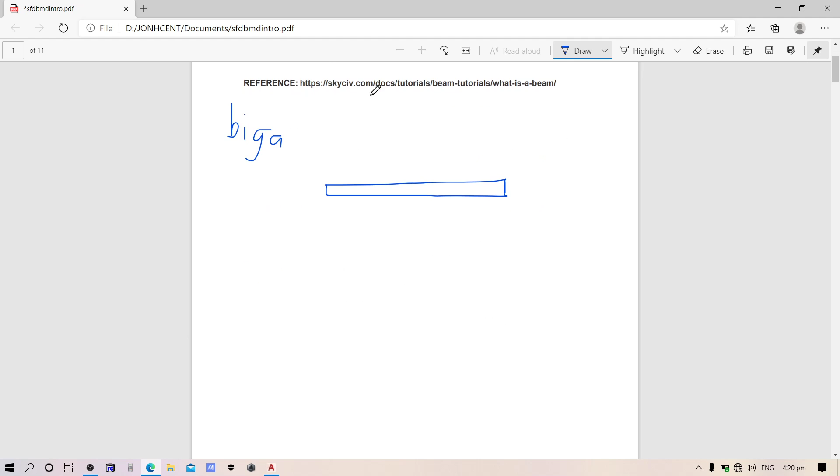Depende sa design. So, we have the T-shape. That's the T-shape beam.

We also have the channel. This will look like that.

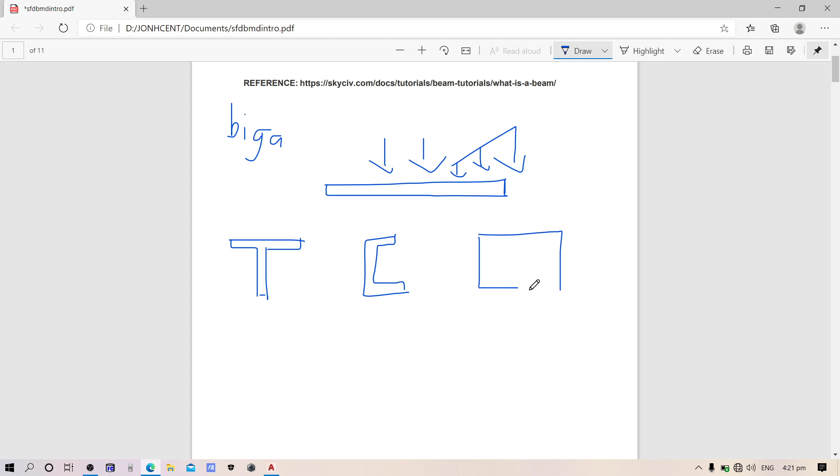Then we also have the rectangular hollow. This is typically the reinforced concrete. So, those are some of the types of beams.

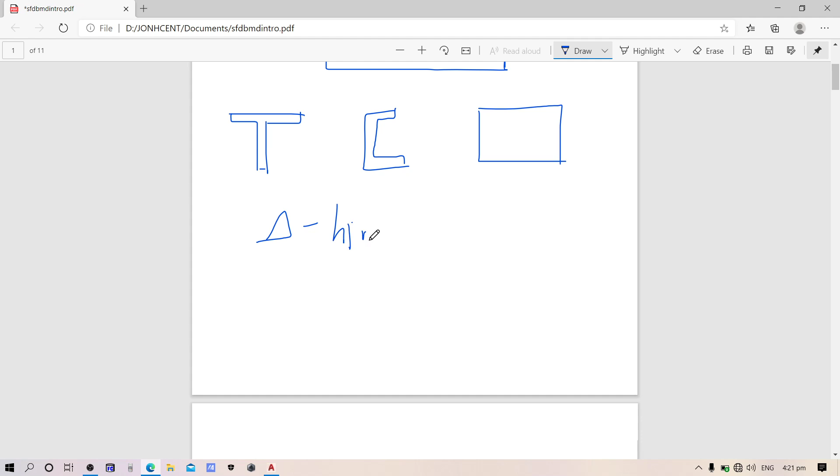So, we have types of beams. We have the simply supported beam. This member, if you recall from statics, this is a hinge, and this is a roller. So, this is its reaction.

As we remember from structural theory, we have a simply supported beam where both ends have supports. For the overhang beam, one end has a support while the other end is hanging, hence the name overhang beam.

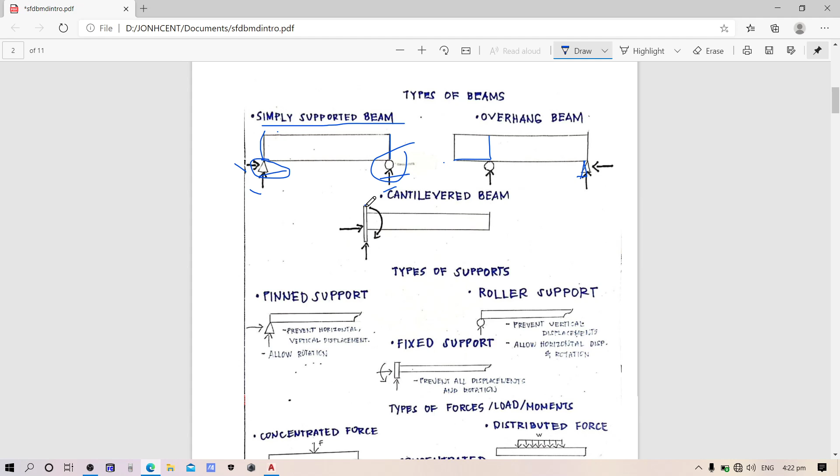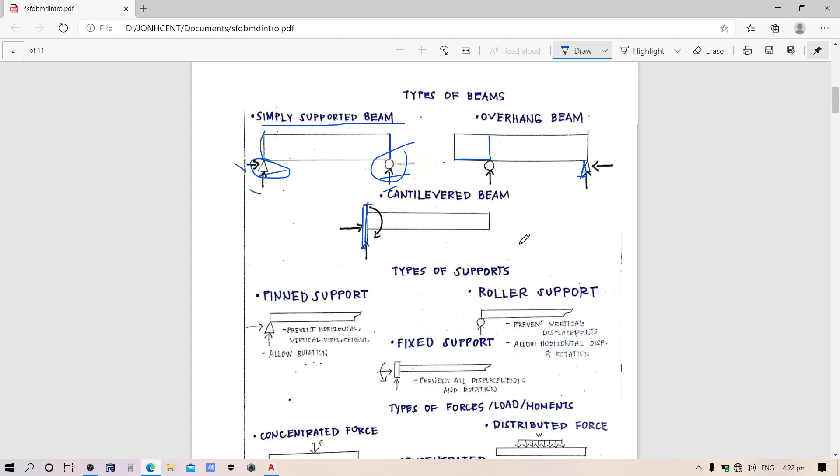So, the types of supports we have, based on these three: we have a pin, which prevents horizontal and vertical displacement, but it allows rotation.

Then the roller support prevents vertical displacement. So they're different. They're the same in that both prevent vertical displacement, but the difference with the roller is that it allows horizontal displacement and rotation. So they're only the same in vertical displacement, not in rotation.

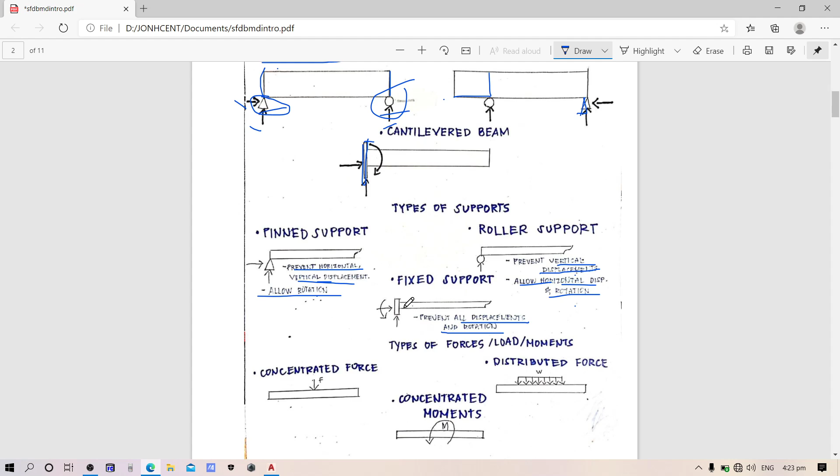So for the fixed support, it prevents all displacements and rotations. That's the one in the cantilever. Fixed support is what we call this part. Let's make it red. This is called a fixed support.

So we have types of forces. Commonly, we have a concentrated force and a distributed force. Then we have concentrated moments, which we may encounter in previous problems, so I'll show how to treat them.

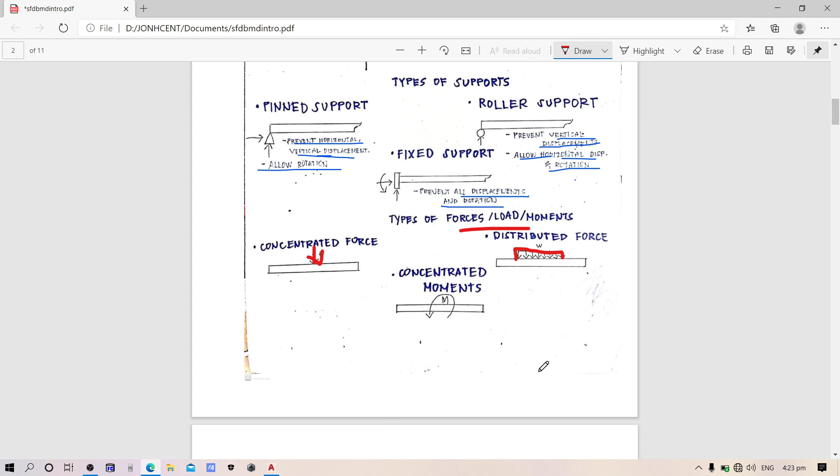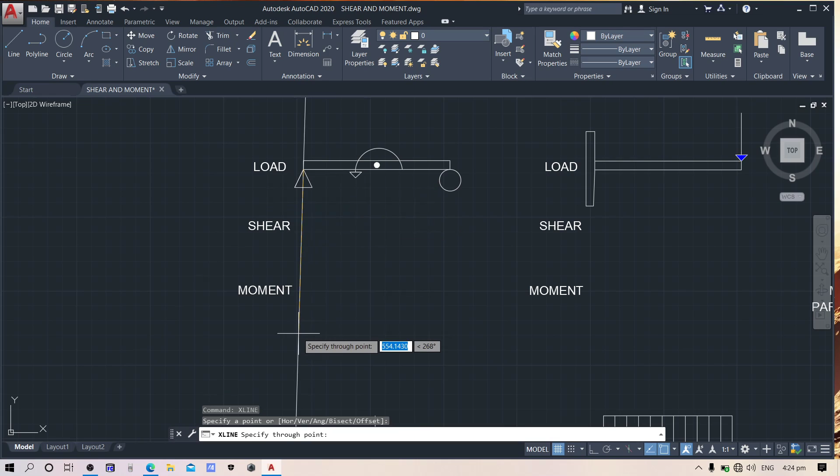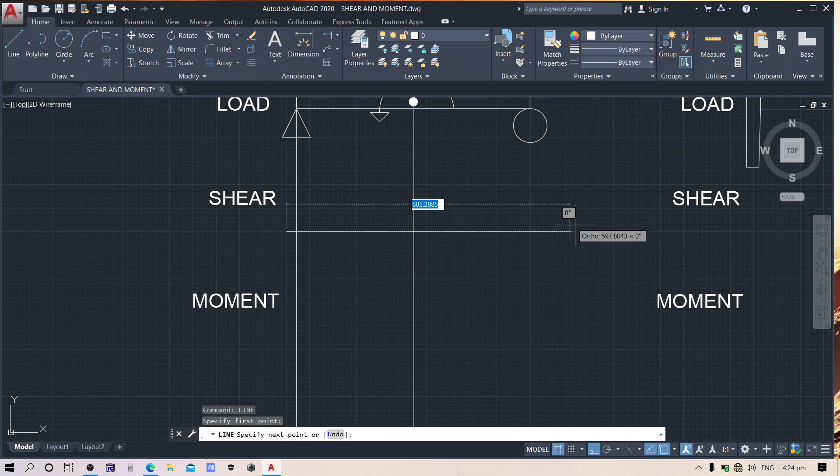Okay, so that our drawing is even. So here, the shear diagram of a simply supported beam, as you remember, this is a simply supported beam loaded with a concentrated moment.

If we go back to the PowerPoint, we have a concentrated moment. So here, the shear diagram will look like this.

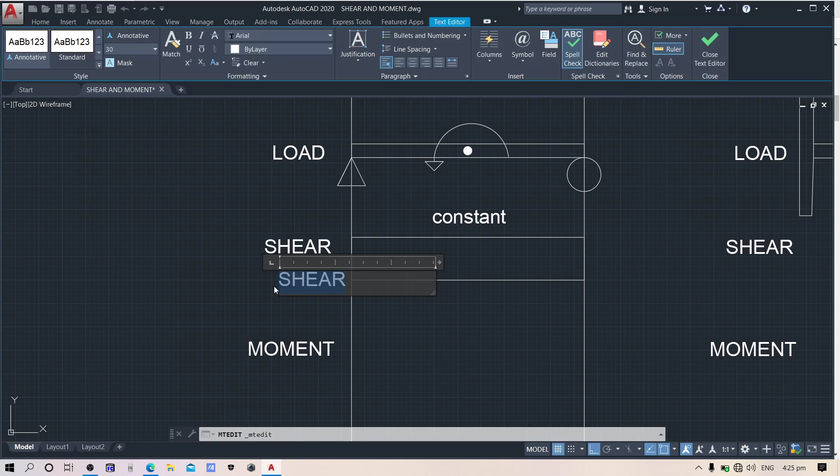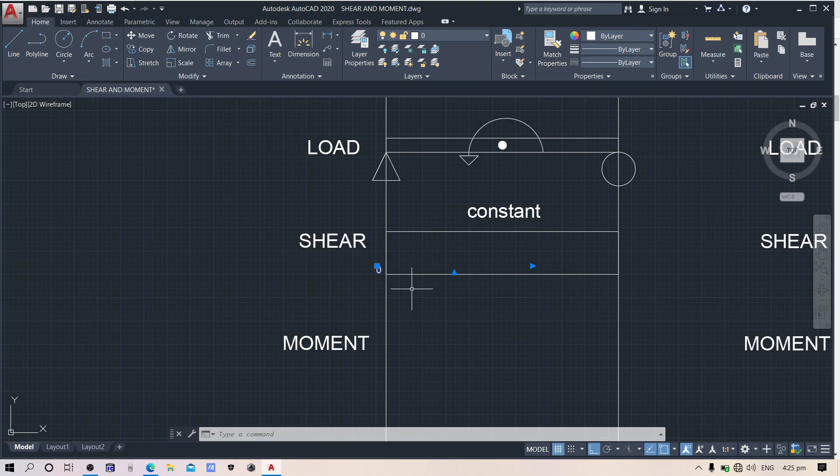Next, the moment diagram. So the moment diagram should look like this.

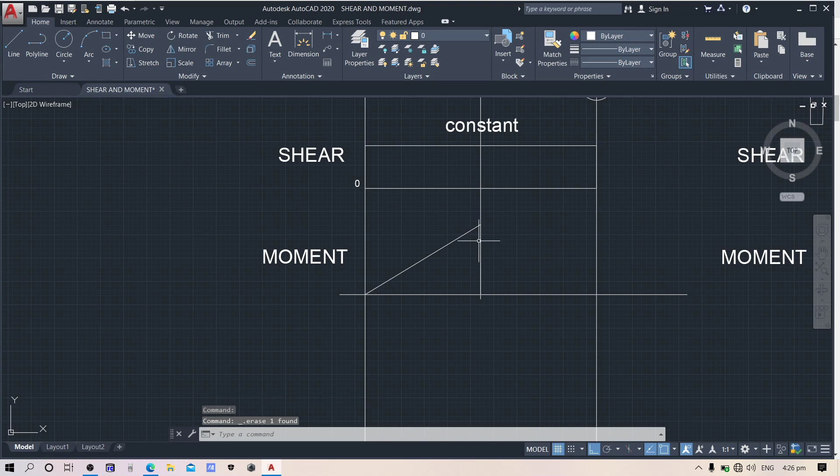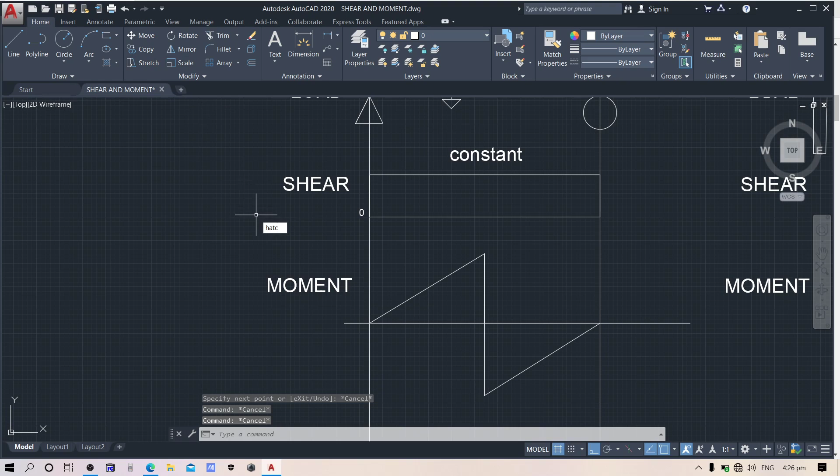So for this part, let's try to hatch it. This, I'll hatch, this is the shaded region. Let's change it to that, let's make it blue. So that part is the shear diagram.

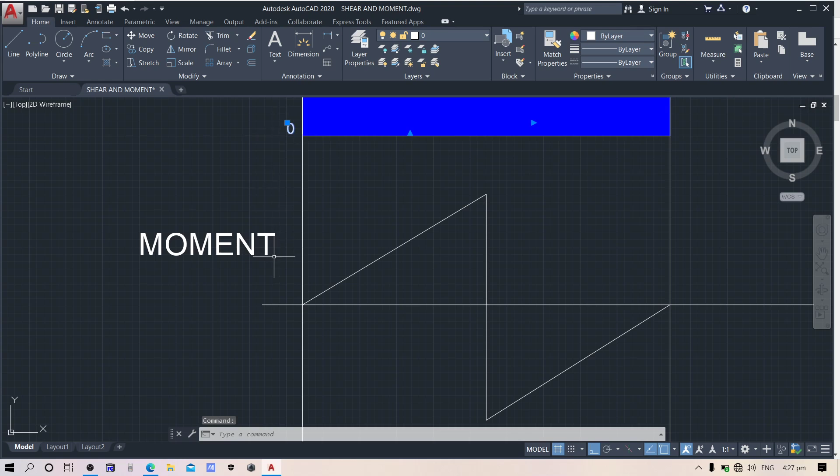Then the same here, inside this triangle, like that. So this is 0, and it should always end at 0.

Next we have a cantilever beam with a concentrated force. Earlier it was a concentrated moment, so let's draw its shear diagram too.

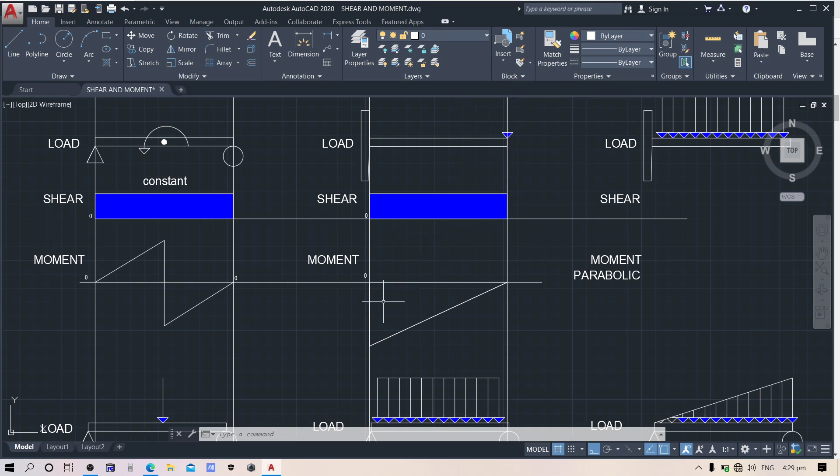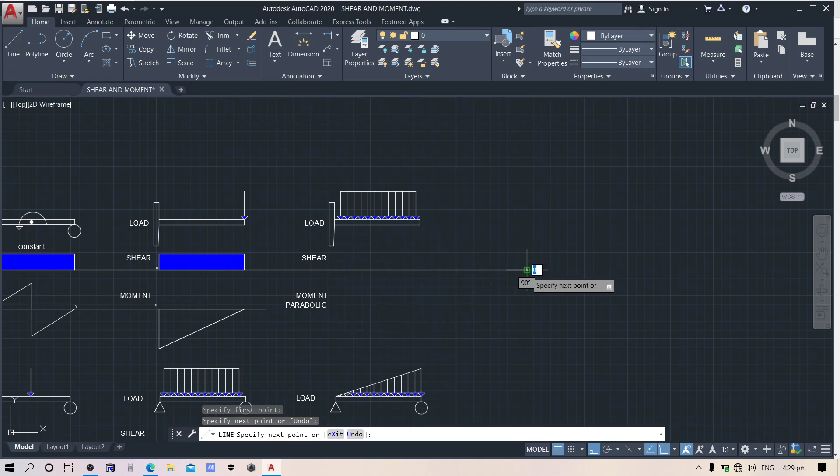Next, we have a cantilever beam with a uniformly distributed load. That's the shape of the UDL. So here, we do the same thing. For this part, this is how the shear diagram should look.

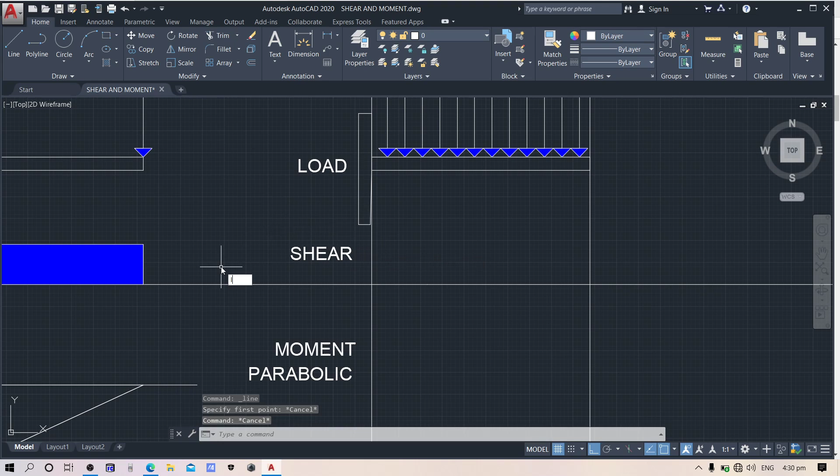Ayan, so let's say ito yung highest value. Let's say ito yung iyong value. Mula ka pa rin dito sa 0, ganyan, let's say 200. So linear pa rin siya. Okay, ayan ang kanyang shear diagram. So hatch natin.

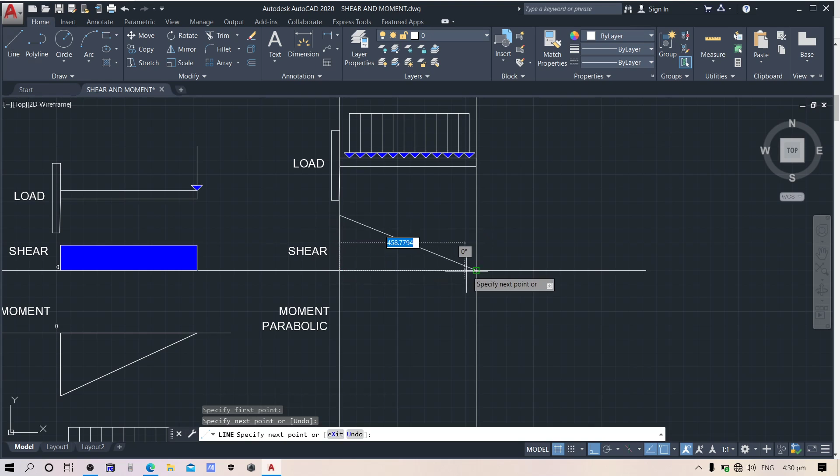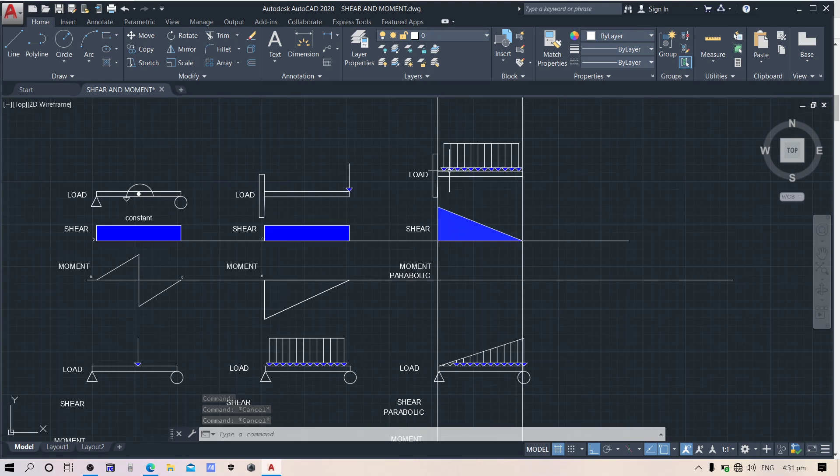So this is the reference kung ano mga magiging itsura ng inyong shear and moment diagram. Ang moment diagram niya naman ay parabolic daw dapat. So dapat kapag ganitong type ng loading and the beam, ang iyong moment diagram ay parabolic. Ganun din, kapag tinignan mo siya pababa, pag ganito yung bagsak niya, since ito yung support. The same manner naman, kung dito sa kabila yung fix, ito yung wala, pag ganun siya. Okay, so common sense lang ang ginagamit.

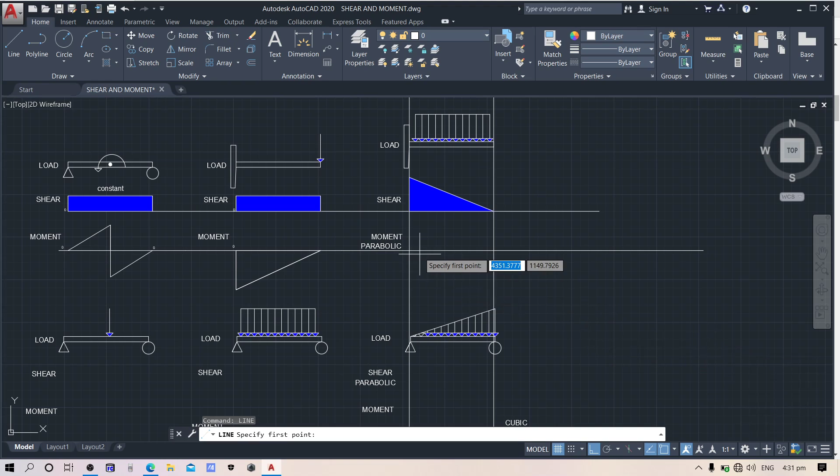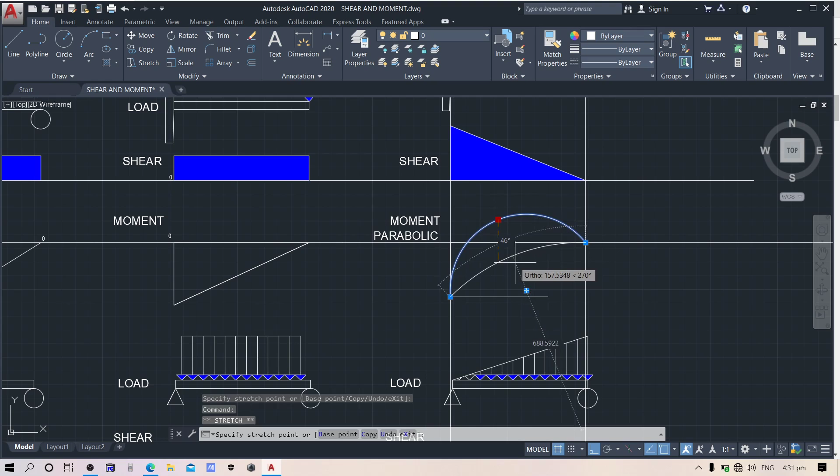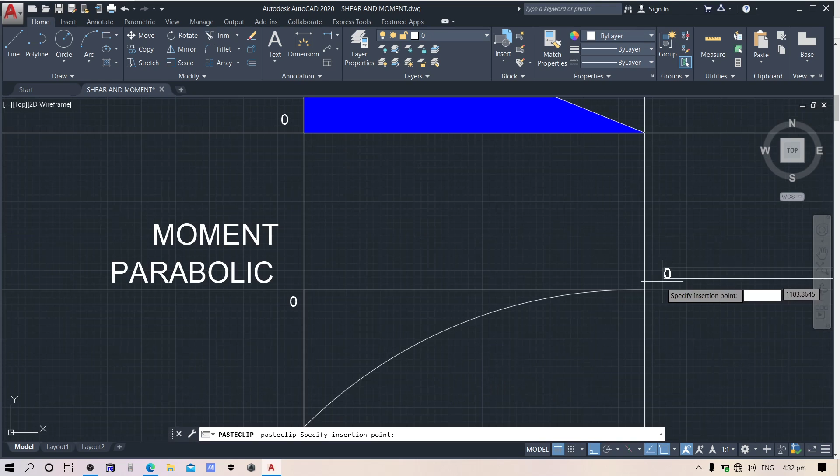Ayan, so let's say meron tayong value dito, halimbawa lang ha. Then sabi, parabolic. So parabolic siya, so ito ang inyong i-hatch or i-shade tong part na to. Then i-input niyo yung value. So the same manner din naman, mag-i-start ka sa 0. Then sa moment diagram, start ka sa 0. Mag-end ka rin dapat sa 0, okay, so 0 din dapat ang iyong end.

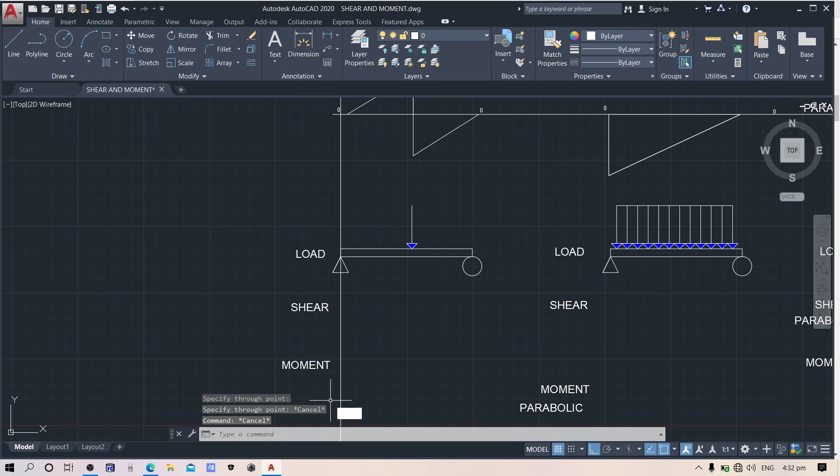Okay, next we have this simply supported beam with a point load. Nasa gitna siya, so ganun din naman ang iyong gagawin. Dito, lagay ka rin ng iyong reference line, dito sa part na to.

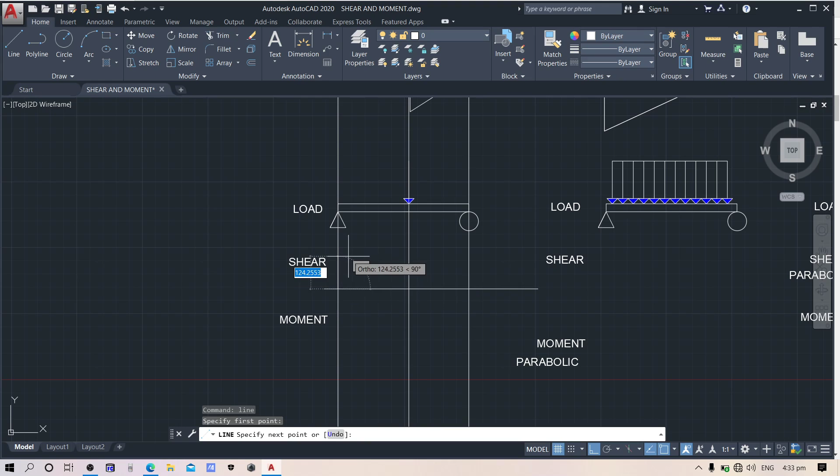Kung ganyan yung loading diagram mo, ang shear diagram niyan ay dapat ganito. Depende sa iyo yung makukuhang computation. So pag ganyan, let's say 100, then ito kapantay nito, baba ka sa 0, then bababa ka rin ng 100. Ayan, so ito yung iyong shear diagram.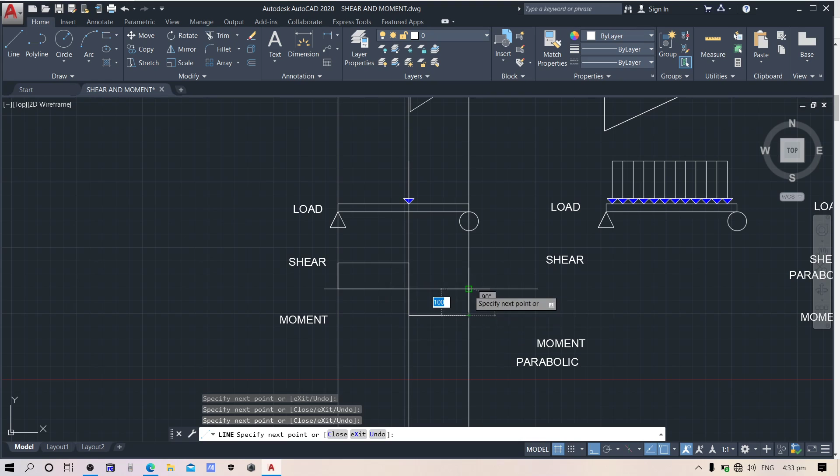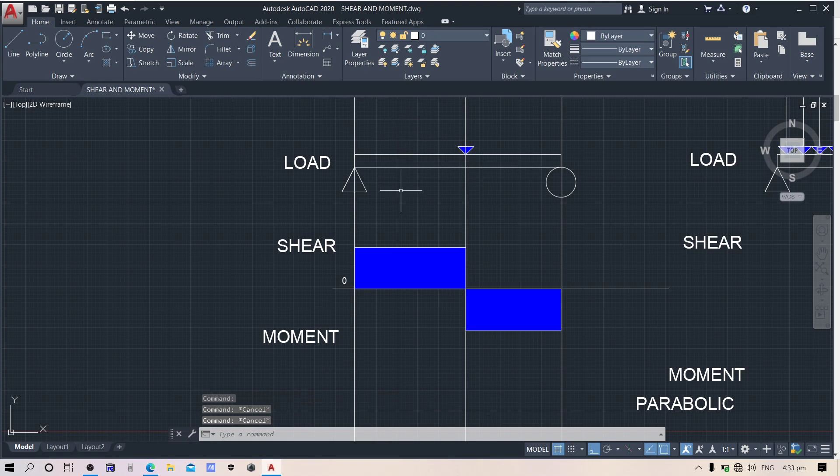So hatch natin siya, dito, ayan, as you notice na hatch na siya. Start din siya sa 0, laging sa 0 ang iyong started point. So depende sa yung computation. Kung nandito naman siya sa kabila, nandito yung loading mo, so dito, maiksi yung pataas mo, then mahaba yung pababa. Depende sa position ng mga forces mo. So yung moment diagram niya, ganun pa rin.

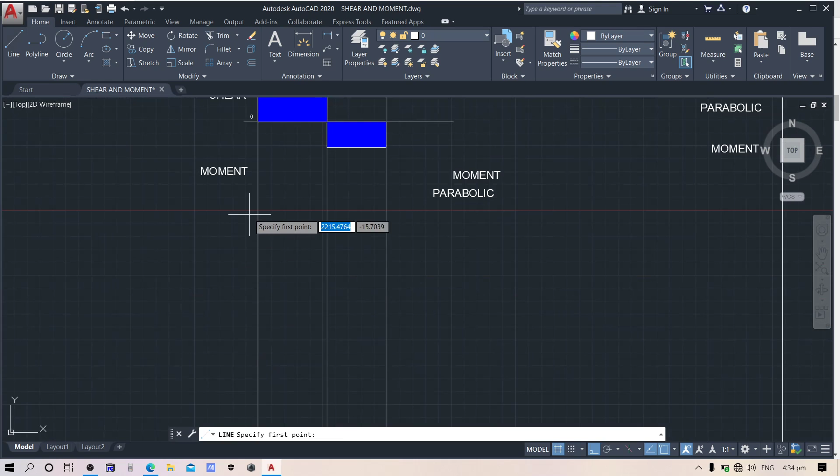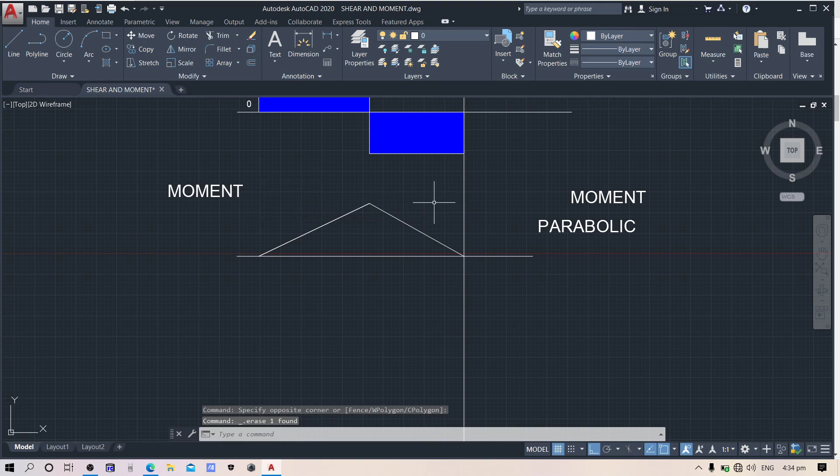Kapag linear, kapag straight line, so linear ang tawag. Then kinaklarify naman kung parabolic or cubic. Dito, depende sa yung makukuhang moment or resultant nung yung mga shear kasi kinukuha yan through multiplying. So kinukuha yung area. Ito, i-hatch mo rin yan. Ayan, so depende kung ano yung highest point mo, so pwede ring pababayan, depende sa computation mo. So it will end also to 0.

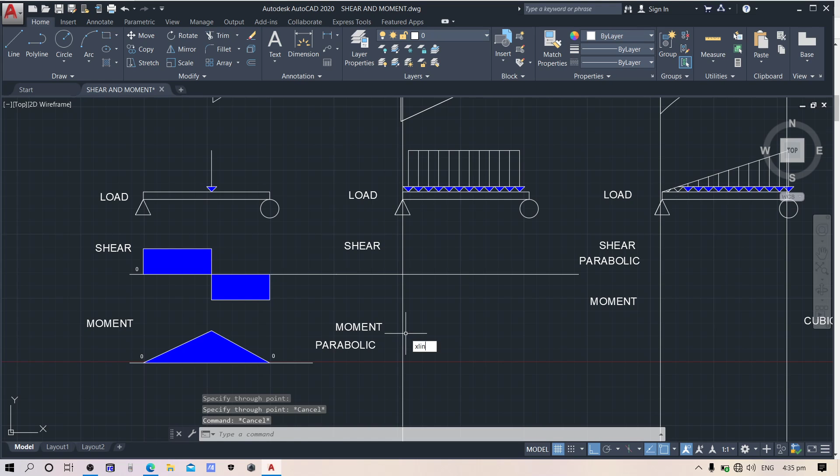So next we have a simply supported beam with a uniformly distributed load. So dito, meron UDL. Yung kanina sa cantilever, ngayon naman ay simply supported. So ang itsura ng shear diagram niyan ay linear. Dito sa UDL, ang pinaka-stress part or the maximum ay sa middle.

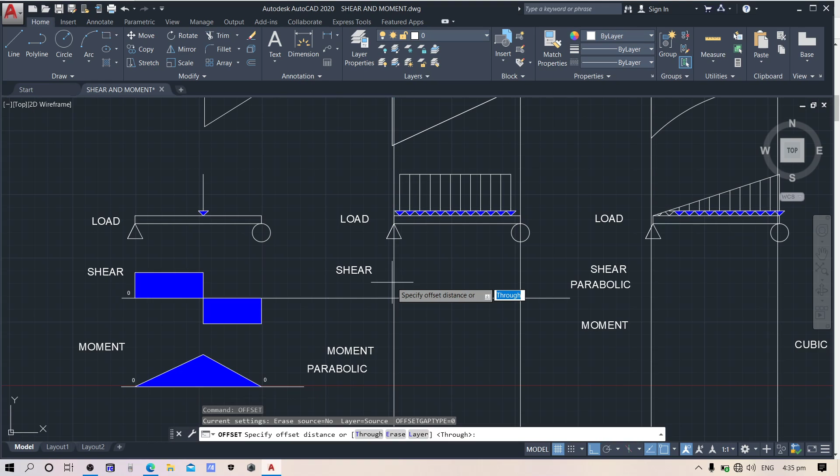500 kasi nilagay kong value, so kalahati, sa middle kapag UDL. So pag ganyan yan, let's say 100, then bababa ka rin dito ng 100, okay so pag ganyan siya.

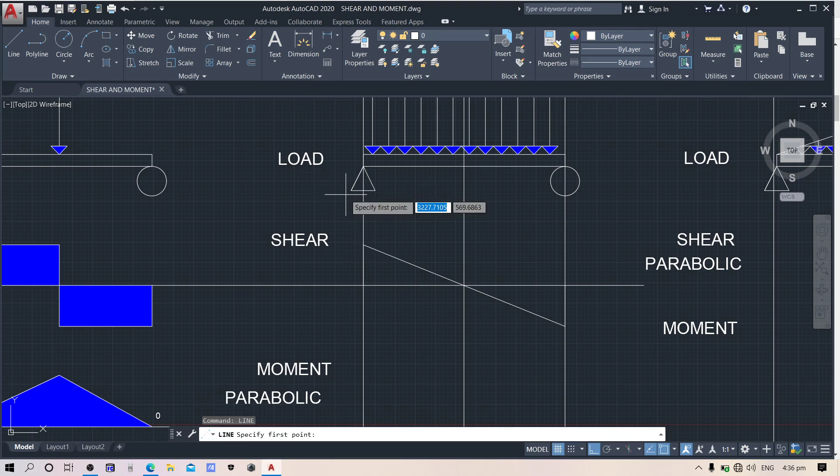Ayan, yang part na yan, yung dalawang triangle, i-hatch mo yan. Ayan, ayan ang yung shear diagram. Okay, so sa UDL, sa gitna yung stressed part.

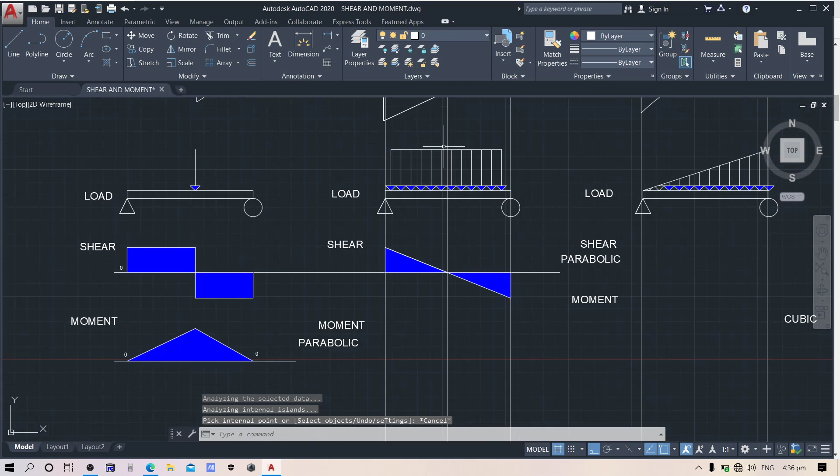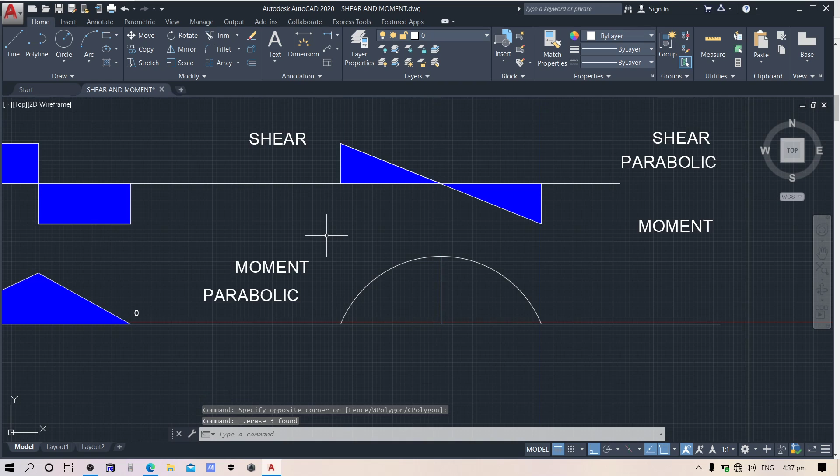So sa moment diagram niya, dapat parabolic daw. So pag ganyan siya, then let's say meron kang highest value. Okay, so dapat parabolic ang iyong shear, moment diagram. Ayan, so dapat siya ay parabolic. So itong mga region na to ang shaded, then so wala to. Start ka din sa 0, mag-end ka rin sa 0.

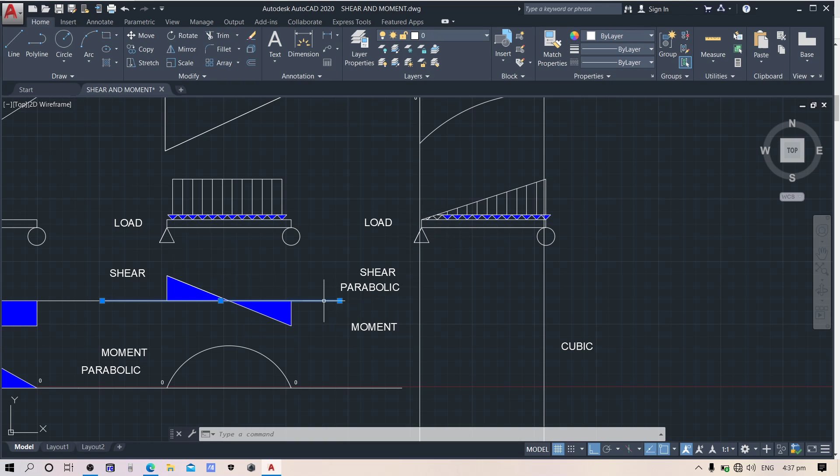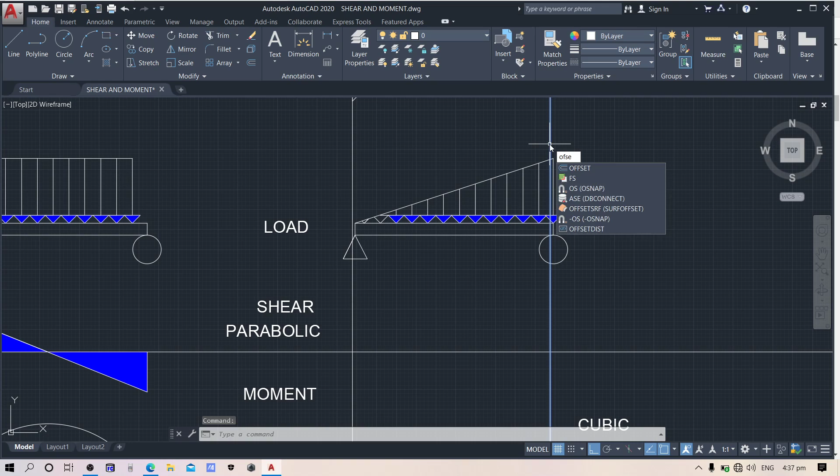So last we have UVL, a simply supported beam with a uniformly varying load. Kapag UVL, also known siya as triangular load. Dito, kung saan yung highest point, mag-count ka ng 1/3, 1/3 ng iyong length mula dun sa highest summit. So let's say we have 1/3, so let's say ito yung 1/3.

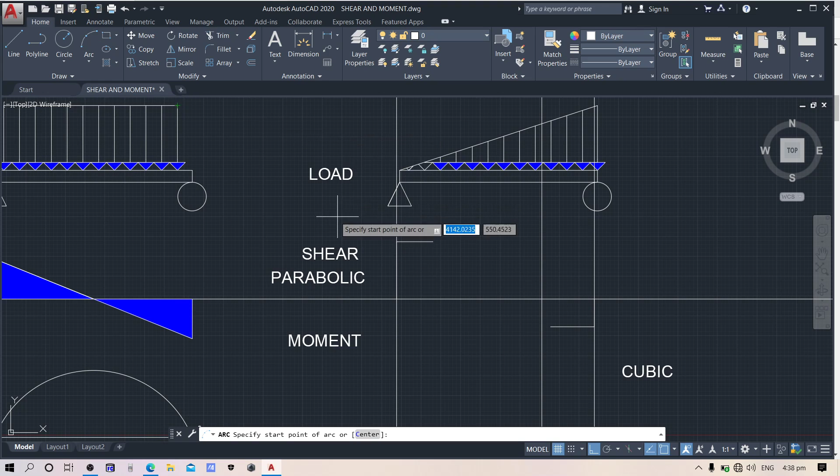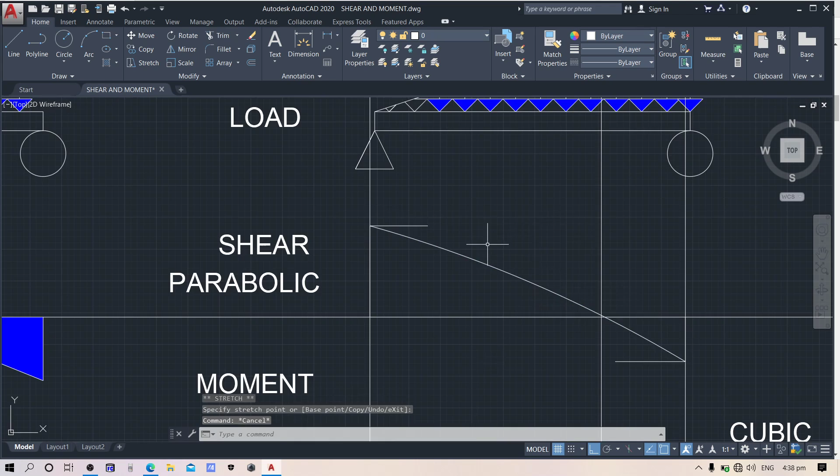So ang iyong magiging shear diagram ay dapat parabolic. Okay, dito, abang lang tayo ng mga points. Ayan, so dapat ito ay parabolic. Okay, so ito ay dapat parabolic ha, naka-curve dapat siya. Okay, so itong part na to, ito, then ito ang shadan mo.

Then last, ganun din, mag-start ka rin sa 0, depende sa yung computation. So moment diagram niya dapat ay cubic. So halimbawa, ito yung 1/3 niya, so dito yan. Ayan, so draw tayo ng arc.

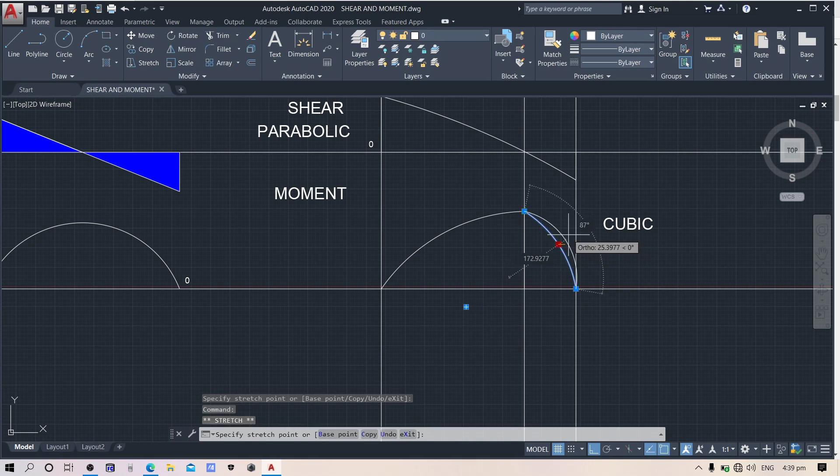Let's say pag ganyan, dyan ka ito yung highest value ng iyong moment. Then draw ka uli ng arc pababa. So dapat, cubic ang shape ng iyong moment diagram kapag ganito ang loading.

So ganyan ang shear and moment diagram. So that's it, I hope you learned something.